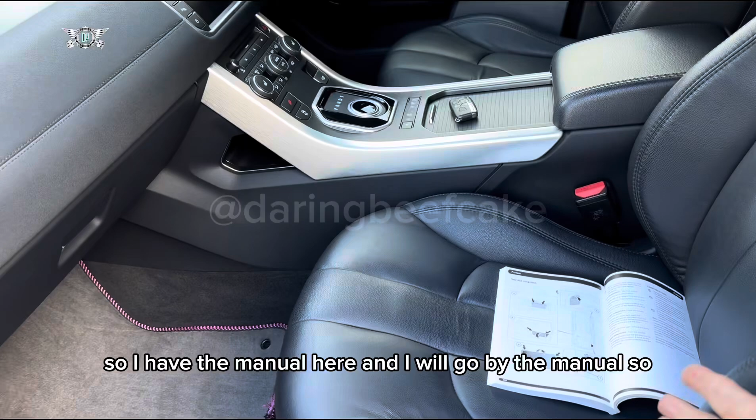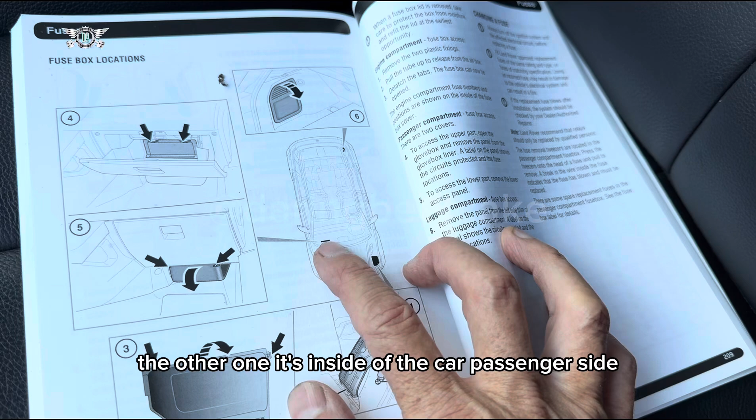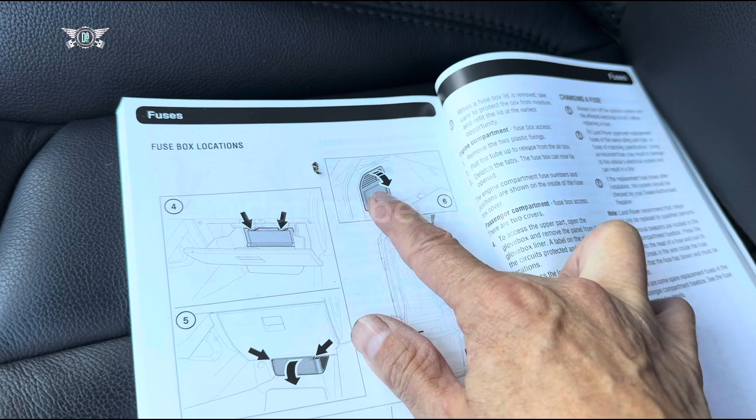According to the manual, there are 3 fuse boxes: one is in the engine bay under the bonnet, another is inside the car on the passenger side, and the other is in the boot, behind that panel. Now we'll have a look at the interior ones first, and it shows us here how to access that fuse box, figure number 4, figure number 5.

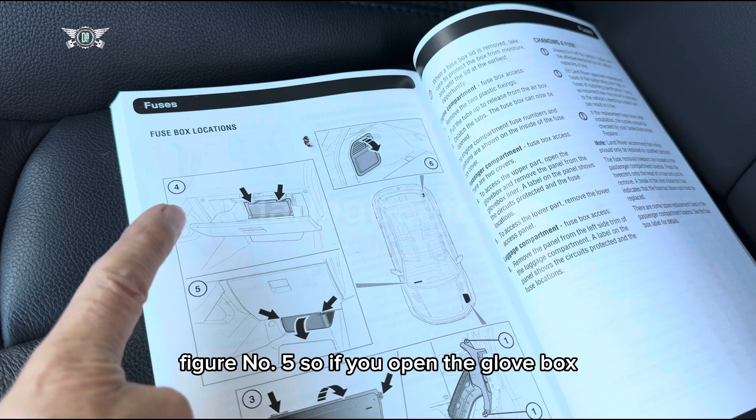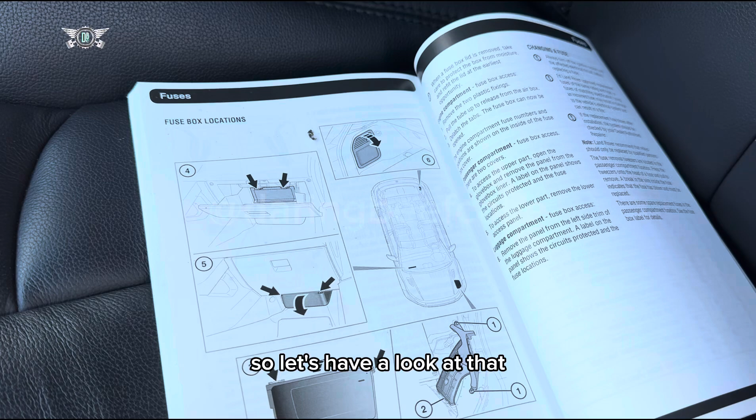If you open the glove box, there is a little cover in there, and you need to push the 2 little tabs down and bring that cover out. At the bottom there is a black cover sitting behind, which again we press on the tabs and remove. So let's have a look at that, but before we do, we'll have a look at the locations shown here in the manual.

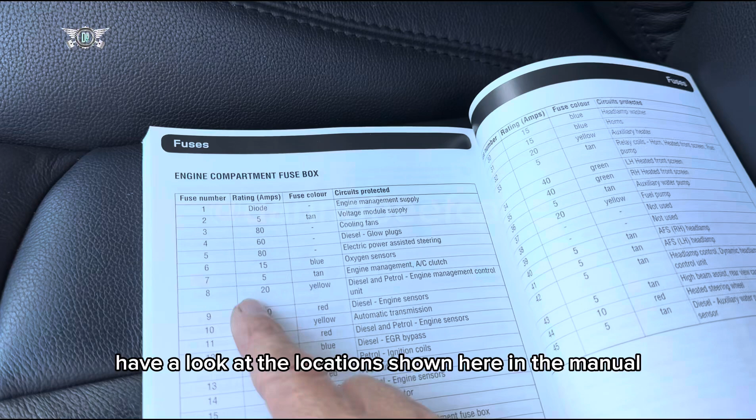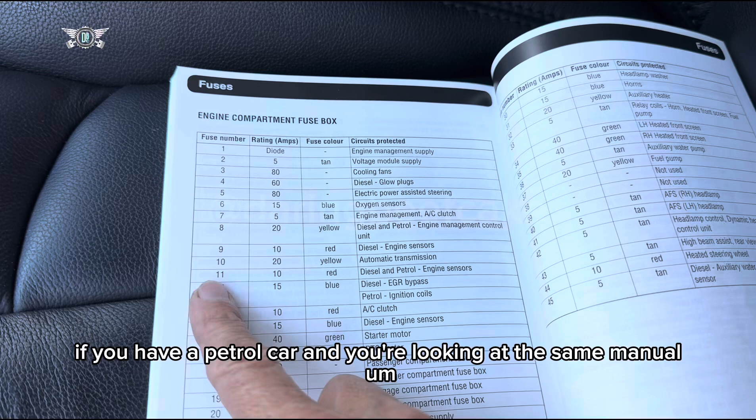So remember, this is a diesel car, so if you have a petrol car and you're looking at the same manual, certain things won't apply, such as diesel EGR bypass. In my case, petrol ignition coils wouldn't apply.

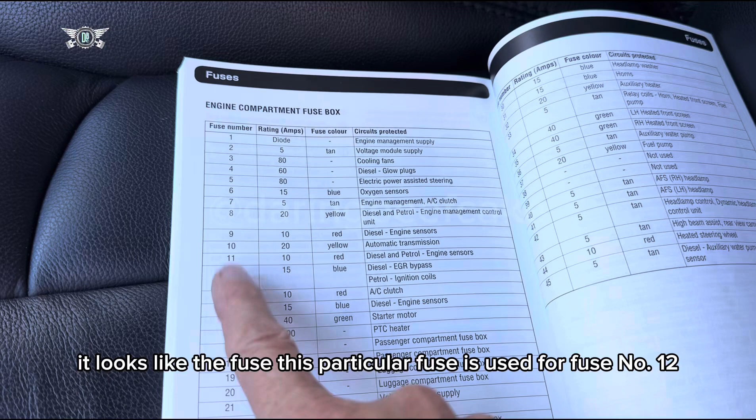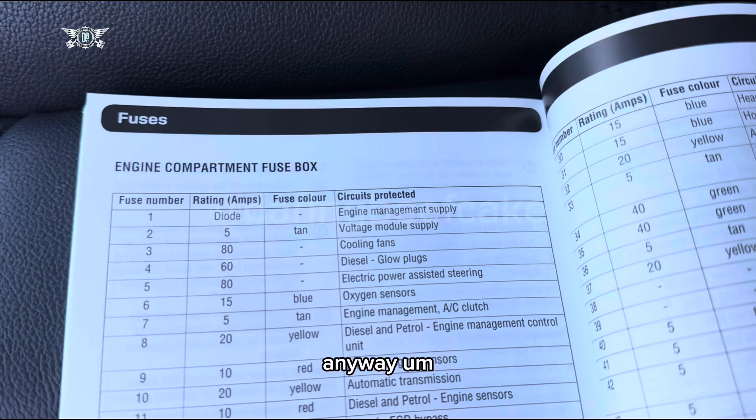However, it looks like this particular fuse, fuse number 12, 15 amp blue, is used for the diesel EGR bypass and the petrol ignition coils. So that's the list there. I'm just going to slowly go down, and if you need to look for a fuse, pause the video and have a look.

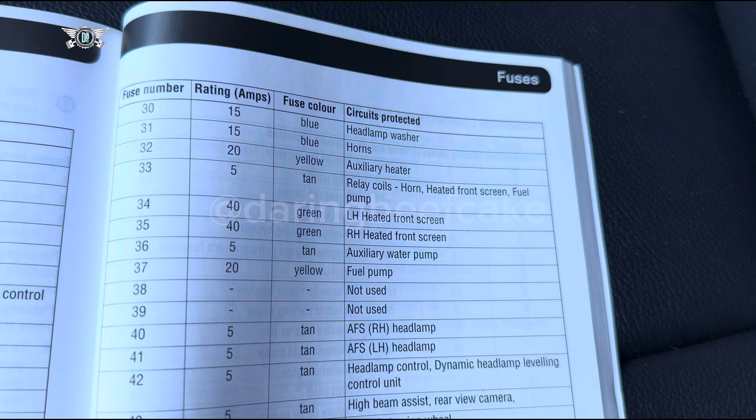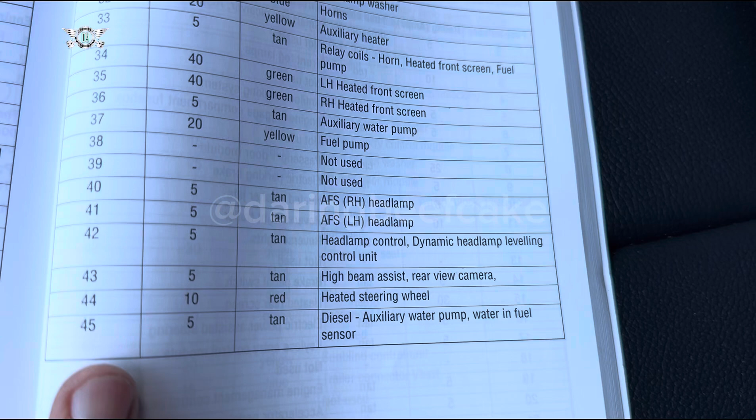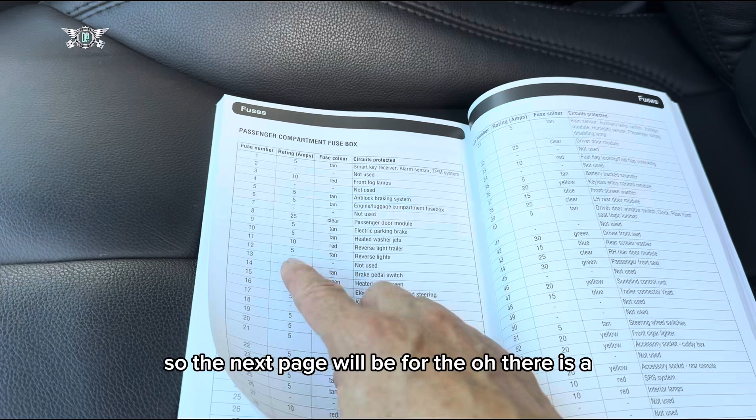And that's it. So the next page will be for, okay, so that's actually the engine compartment fuses, and this will be the passenger compartment fuses.

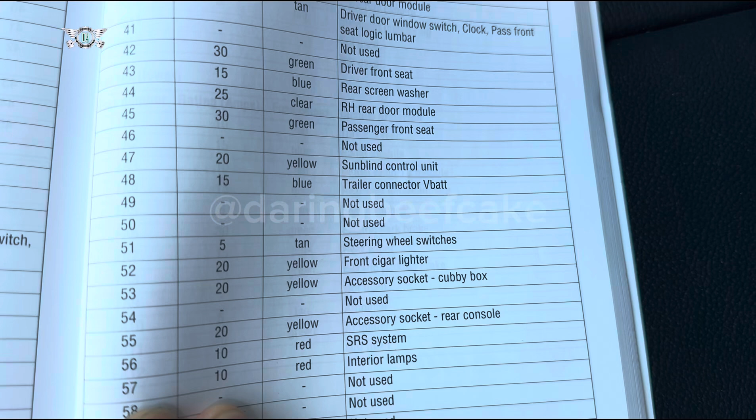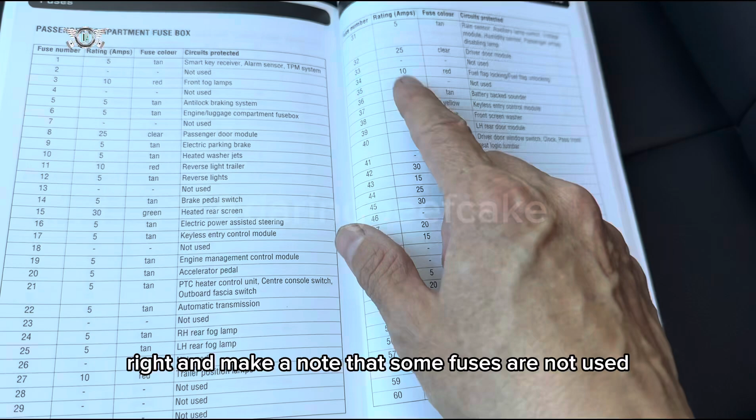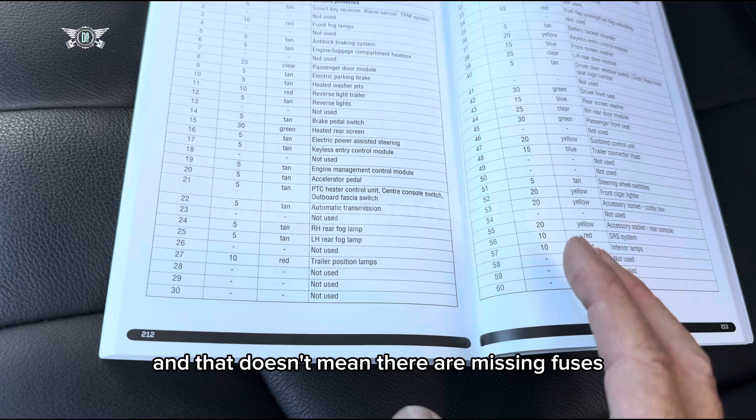Make a note that some fuses are not used, so there will be empty slots on your fuse box. That doesn't mean there are missing fuses, it just means that particular fuse may not be used on your car because the car doesn't have that feature. So like this car doesn't have a sunroof, so a sunroof fuse may not be shown in here.

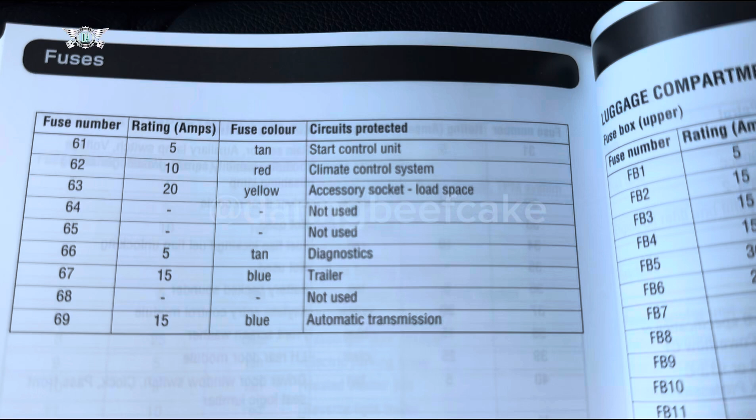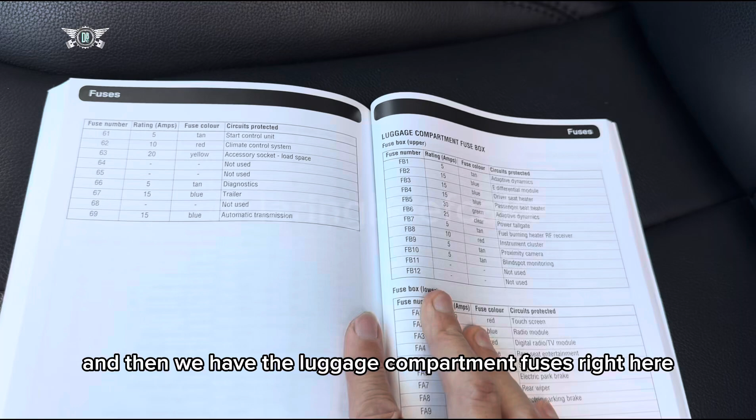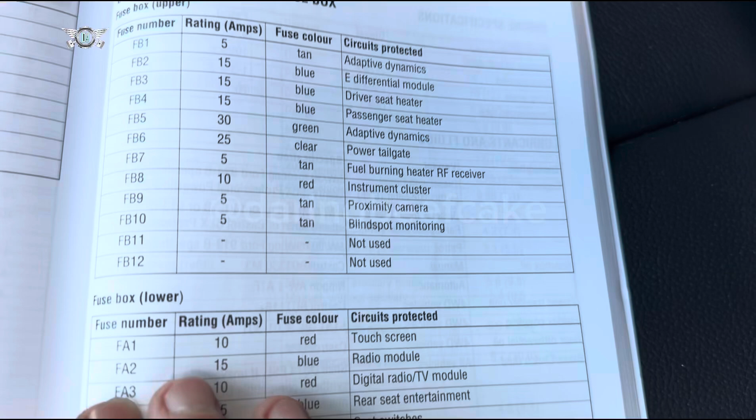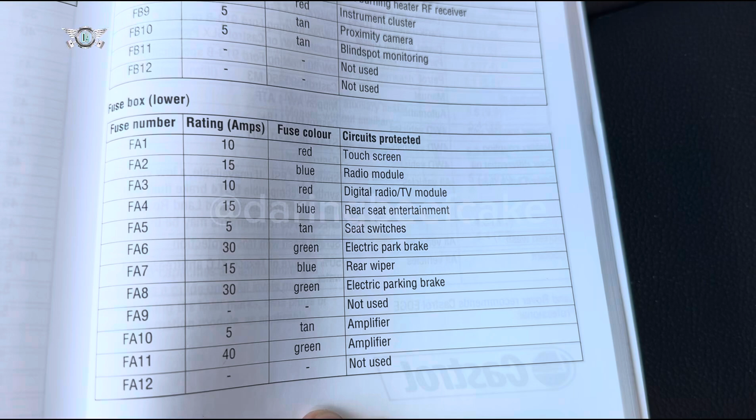There are some more in here, numbers 61 to 69, and then we have the luggage compartment fuses right here. It says upper and lower. That is it as far as, yes, this is other stuff, specifications for engine, lubricants and whatnot.

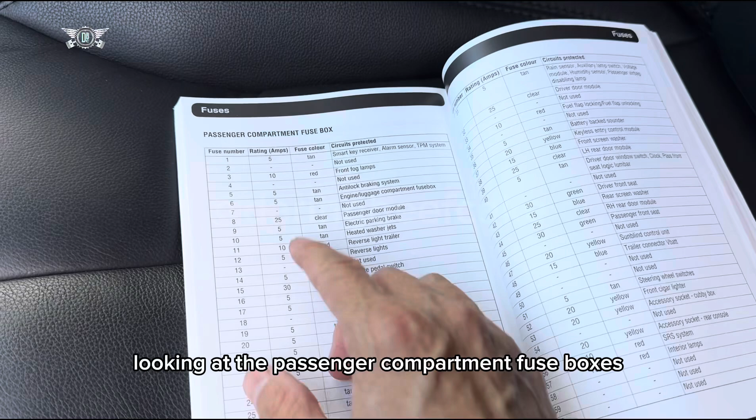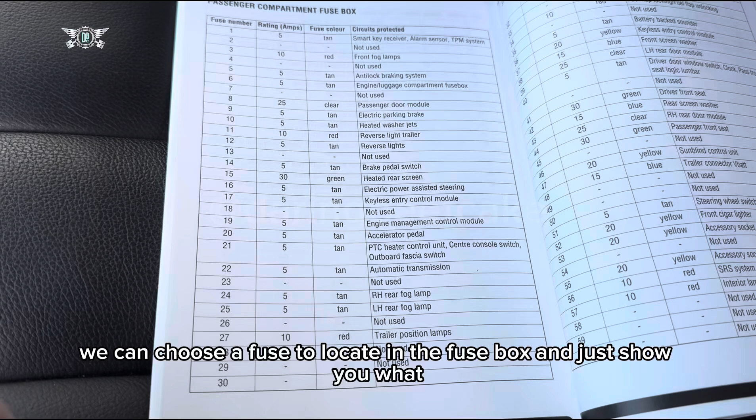So now if we use one of these as an example, looking at the passenger compartment fuse boxes, we can choose a fuse to locate and show you how you can find it. So say...

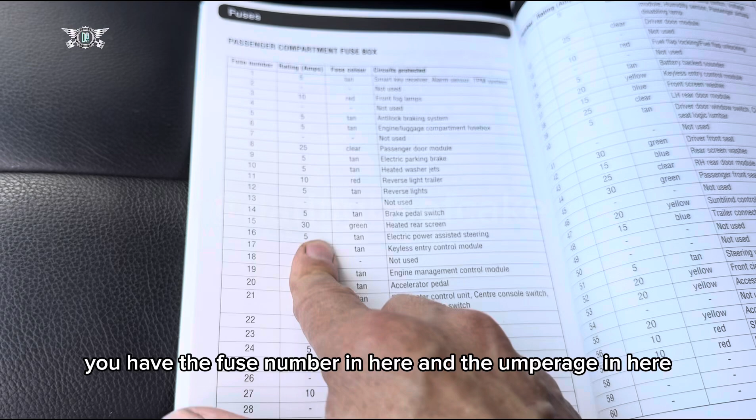By the way, you have the fuse number here and the amperage here, so 25 amps, 5 amps, 5 amps, and then it gives you the color of the fuse. If you found a different rating fuse or a different color fuse in the slot, that may mean that somebody has already had a look at that and perhaps placed the wrong fuse.

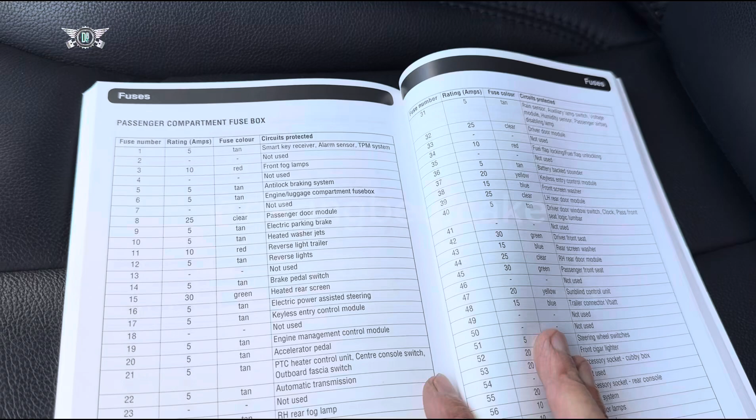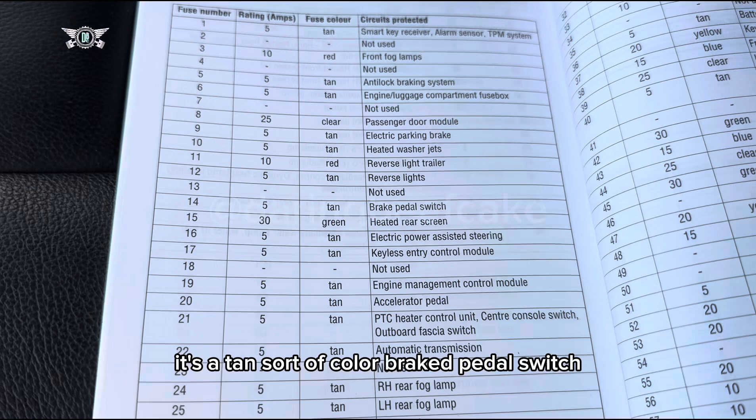So I don't know what we can look at here, say fuse number 14, 5 amp, a tan sort of color, brake pedal switch. Let's look for that, and at the same time we'll see where the fuse box is.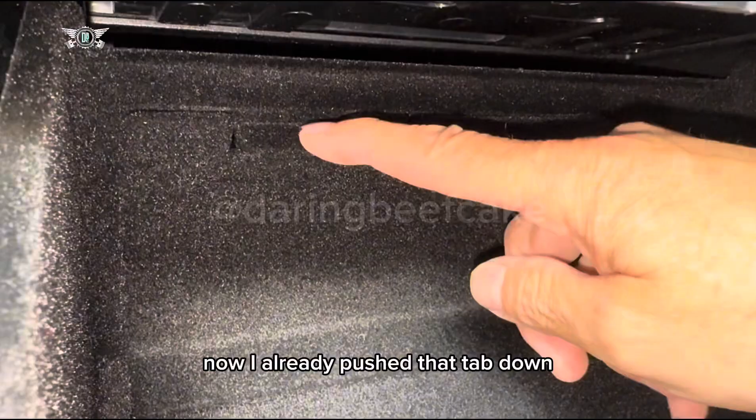Open the glove box here, and in there is that cover. I already pushed that tab down, and all you have to do is push the tab down and bring this out. So technically I had already... there we are. Okay, so take that out, and you will find also some fuse allocations here.

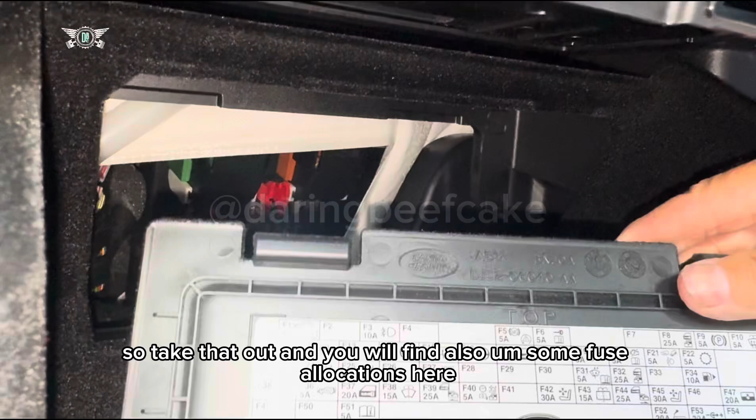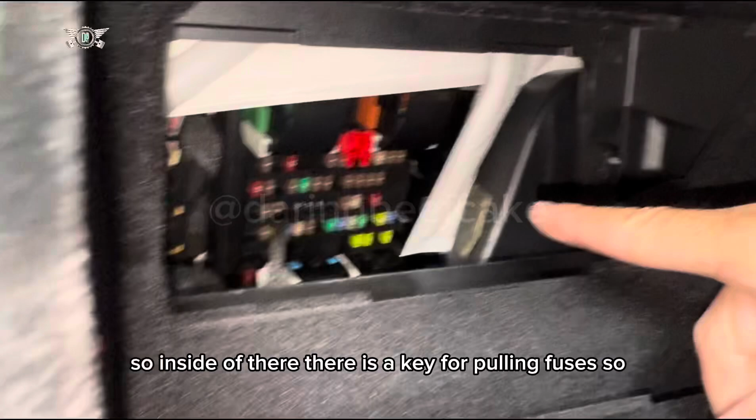You can see the drawing there and the numbering, so fuse number 1, number 2, number 3, number 4, and so on. And there is also a key inside of there for pulling fuses. This little key here, this side is for the small fuses, and usually this side is for the bigger fuses.

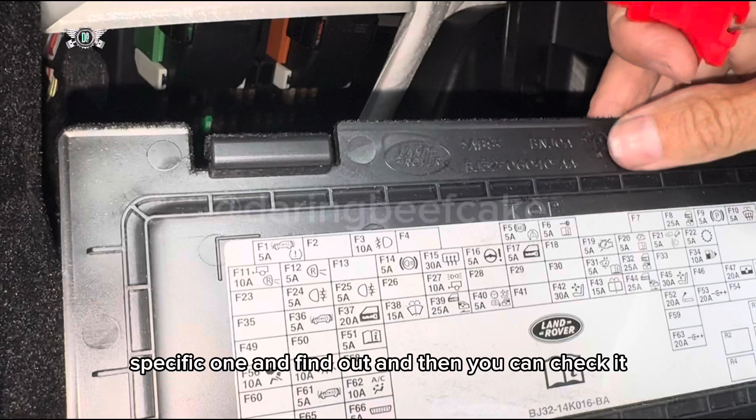Now obviously nobody really recommends just going in there and pulling fuses out. Make sure whatever fuse you're looking for, find that specific one, and then you can check it. Don't just pull all the fuses out. So if you're looking for fuse number 14, as shown in here, 5 amp, brake light switch, something like that.

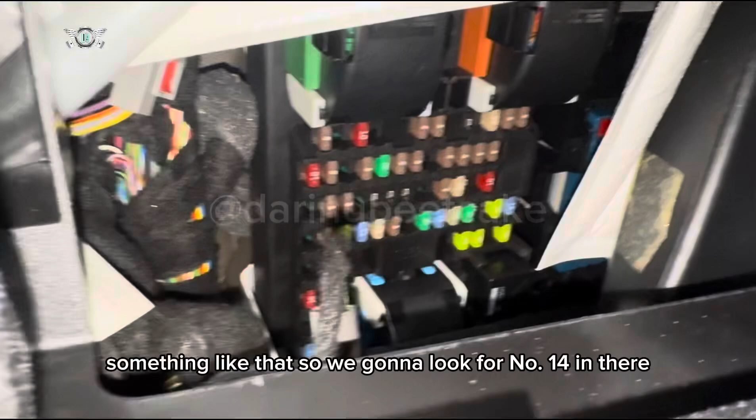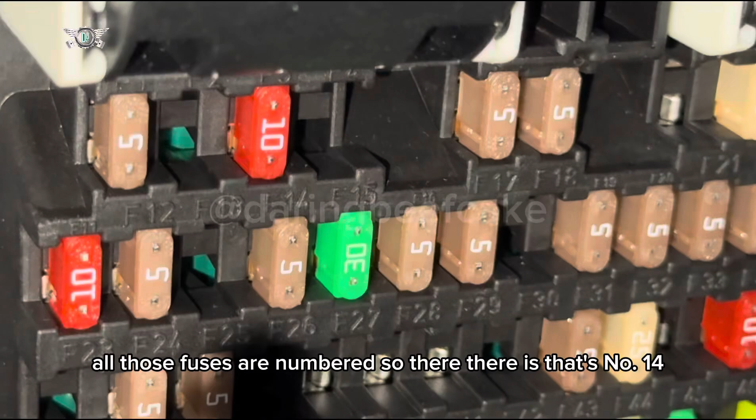So we're going to look for number 14 in there. You can see all those fuses are numbered. So there it is, that's number 14, right next to the green one, this one here. So that's how you would grab it and take it out.

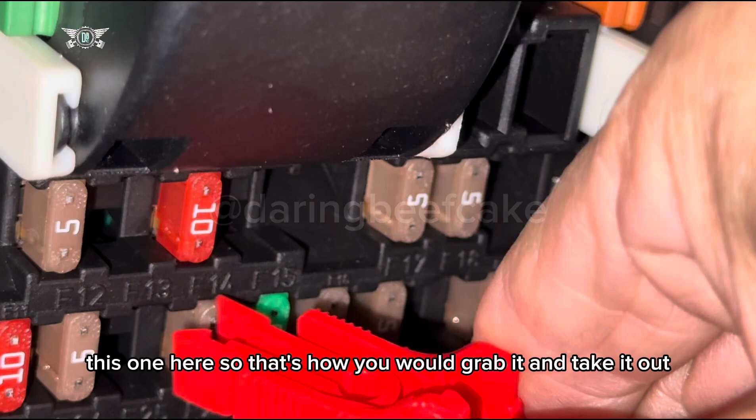I don't really want to pull it out, and I'm not really looking for any fuses as such. I just don't want to pull it out because that could cause a fault code to be generated on the car. So that's how easy it is really.

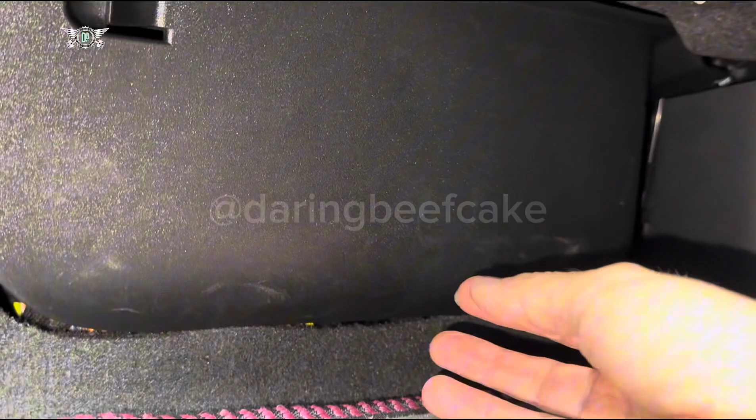You can find the same fuse box from down here. It just gives you some access. So you have this tab here, and on the other side that's where you have some more fuses. It is the same fuse box, but it's quite long, so it goes all the way down here.

So you may not be able to access this fuse from the glove box compartment, which is fuse number whatever that is. Let's try to focus on that. All right, so those are actually spare fuses.

Those 6 there are spare fuses. And just there we have fuse number F66, 68 and 69. But you can see that 68 is not available - there's no slot for it even. So that's pretty much it.

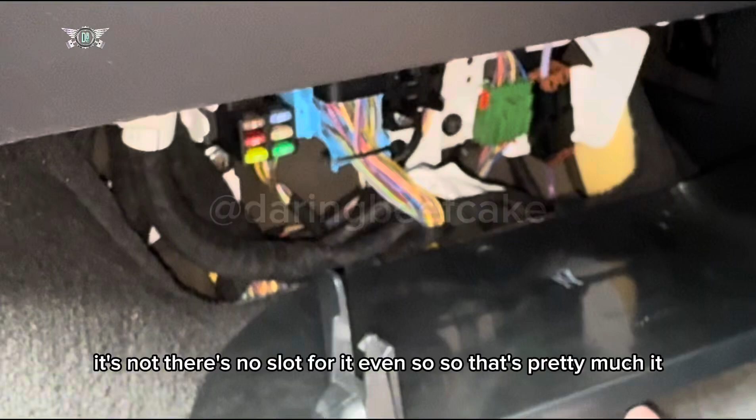Now we can fit this back, and we can also obviously close this one.

There we are. And now we're going to look at the ones under the bonnet. So open the bonnet.

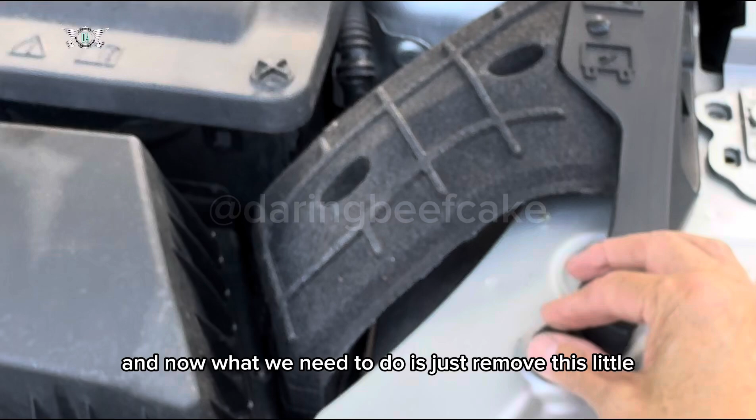We've already seen the list, so we don't really need to check that again. And now what we need to do is just remove this little - okay, there's a missing one there. That is this type of button there, which I do remember losing one, so which must be the one that was there.

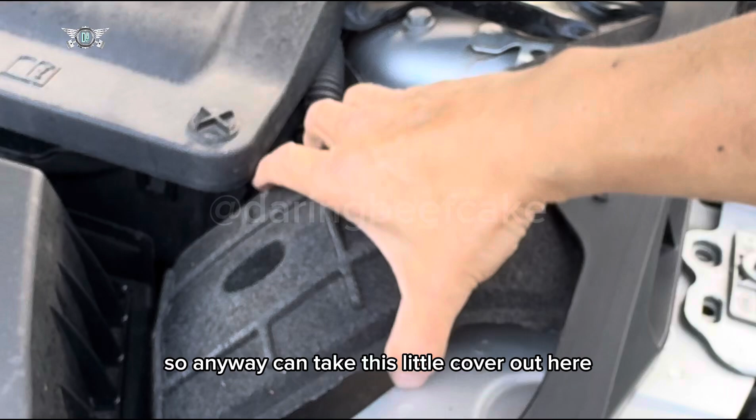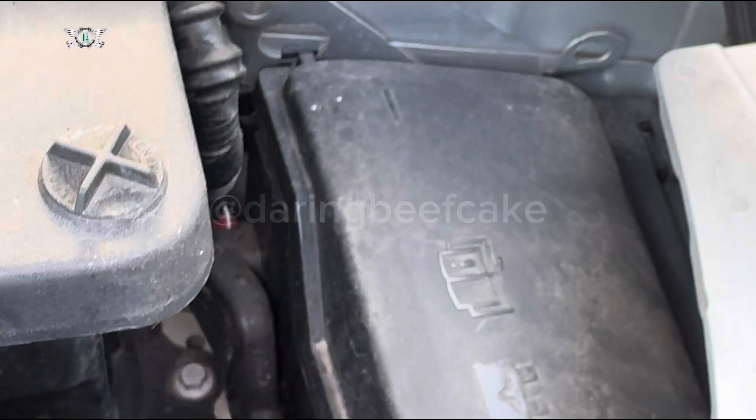So anyway, you can take this little cover out here quite easily, and then this is the fuse box in here, which we want to try and push those tabs to one side and get this cover out.

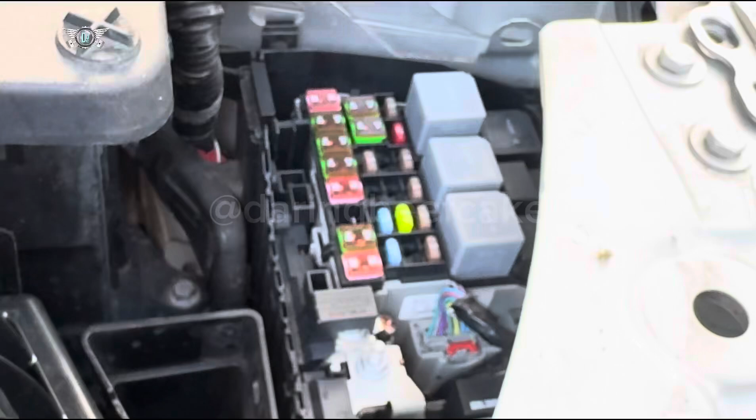And again, you have some spare fuses right there, and you have the little key. That white thing there is the key for pulling out the fuses. So you have the normal fuses here, and then you have those micro fuses there. Those are the spare ones.

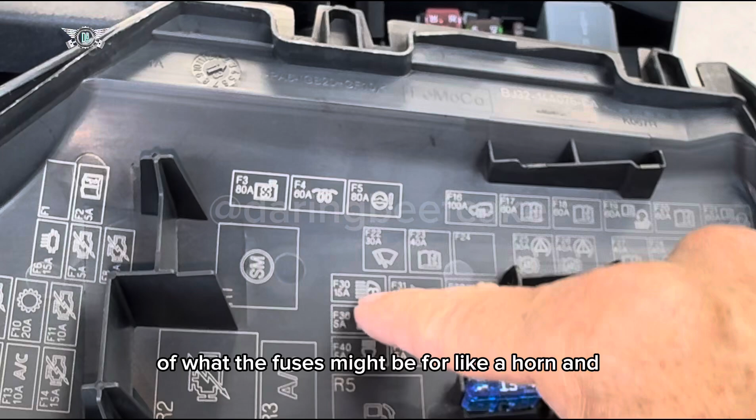And again, this cover sort of gives you a list of what the fuses might be for, like a horn, radiator fan and so on, a few other things. But obviously with your manual you can be a bit more specific about those fuses.

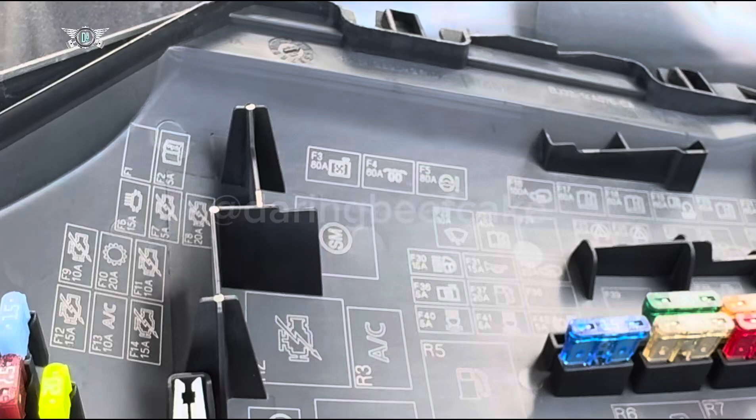And here's where we have the fuses. We also have some relays. Unfortunately, the relays are not - well, actually there might be. These are the relays here. So it looks like the diagram sort of shows you maybe wiper blades, or like wiper motors.

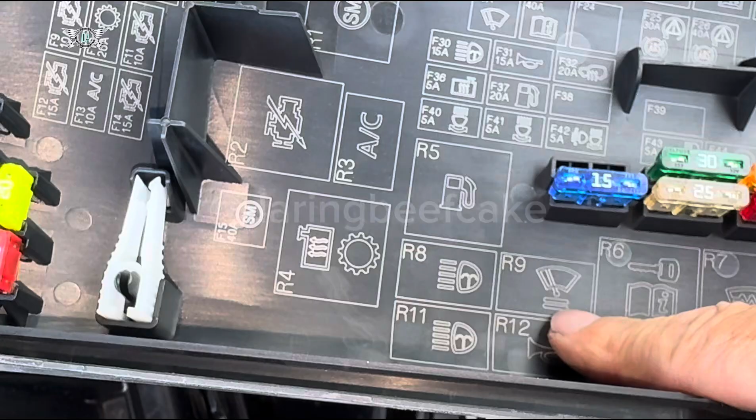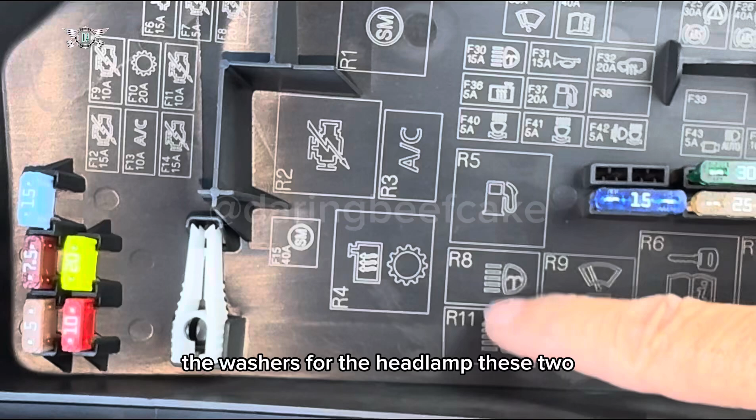This is like I think this is the heater of the windscreen, the key, another sort of wiper blade, maybe another different setting, a horn relay, the washers for the headlamp, these two, that's the fuel pump, maybe another relay here. This might be for the radiator fan.

Another one there, not sure what that is, but yeah, usually most cars don't really show you what the relays are for, so in this case it's not bad. Another relay there, that's for the AC, air conditioning, and that's an engine one.

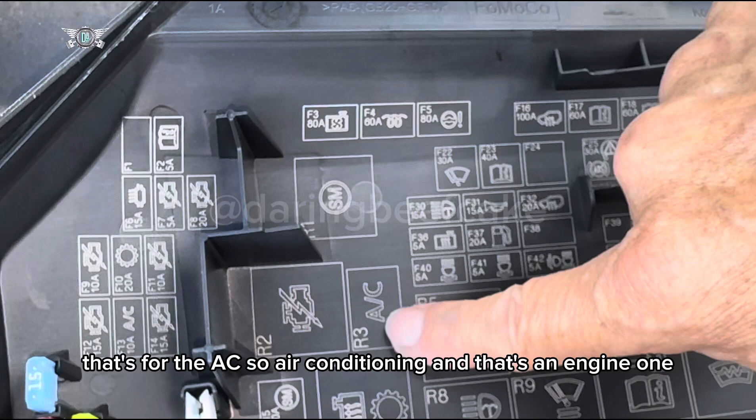And well, that's where your fuses are, that's where your relays are. Some more fuses down here, and I'm pretty sure those are also numbered. So if we have a close look, you can see that F30, F36, F40, 41, 42 and so on. But you can also see the empty slots where fuses are not used. So on models which may have other extras, may actually have those fuses in place.

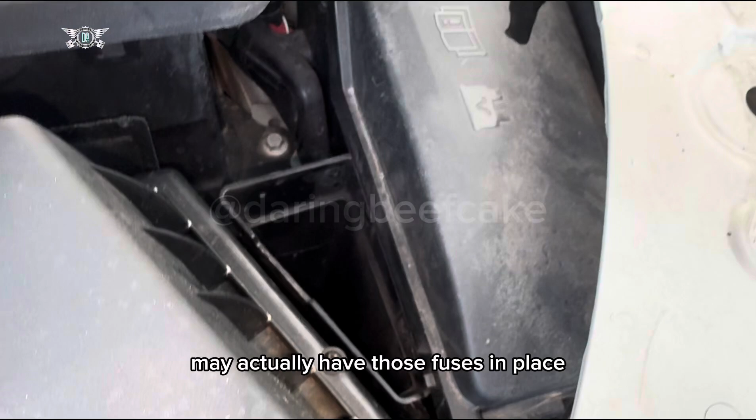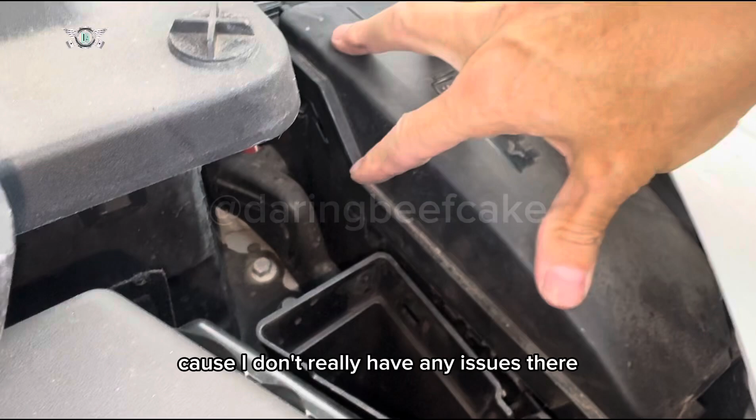So just gonna put this little cover back on here. Again, I don't need to start pulling fuses because I don't really have any issues there. Nice and locked. And then we can put this cover in here.

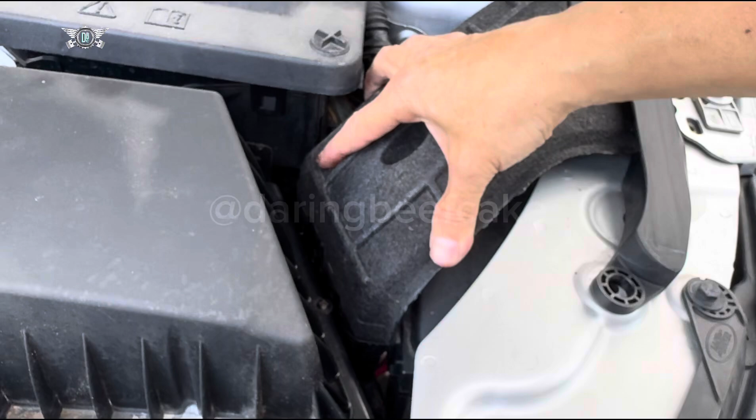Make sure that is fitting nicely in there. And then we can put our little clip back in here.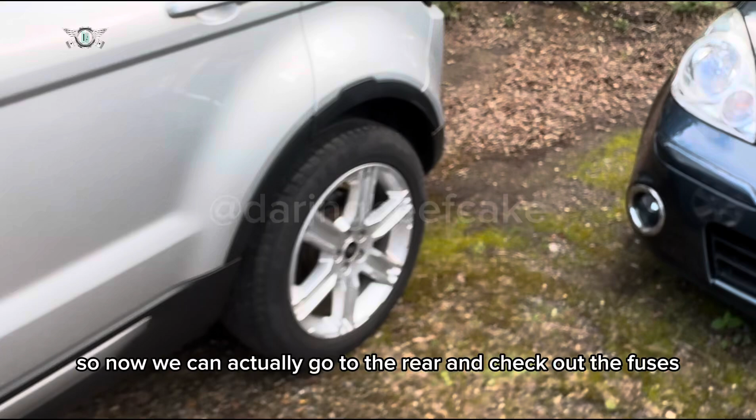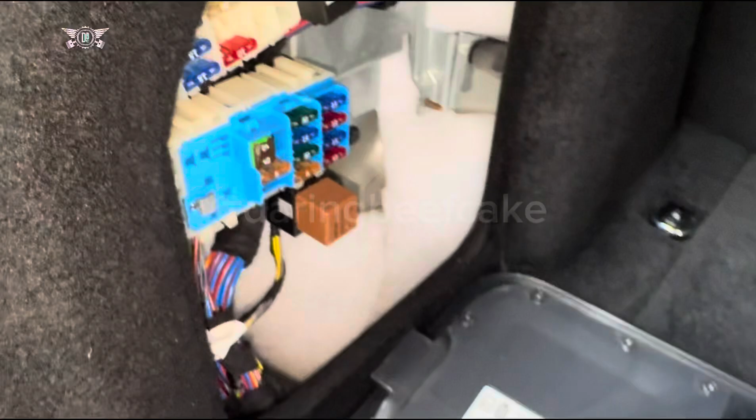And that is that. So now we can actually go to the rear and check out the fuses. So open the boot, and behind this cover is your fuses. And again, another relay, and again another list here of what the fuses are for.

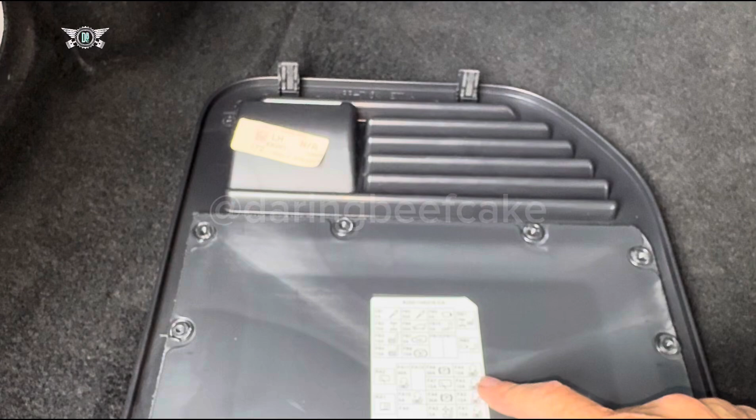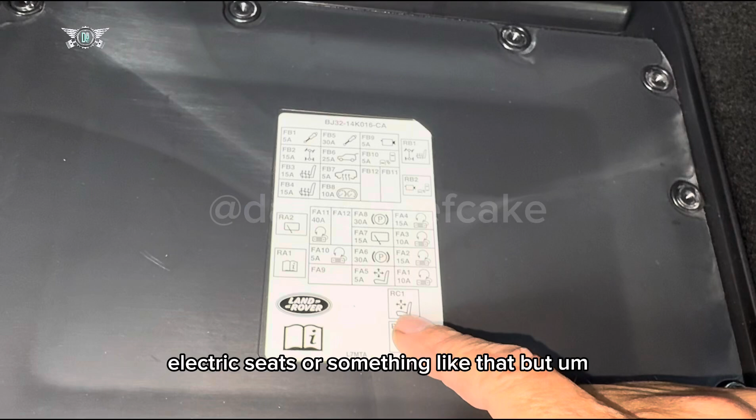So like this relay here might be for the electric seats or something like that, but well, again, I'm not really sure. That might be for the rear wiper blade one. And well, yet again, you have the fuse numbering, the rating, the amperage.

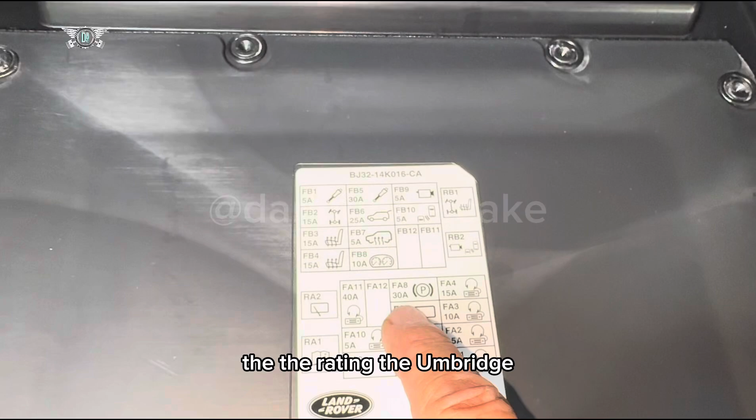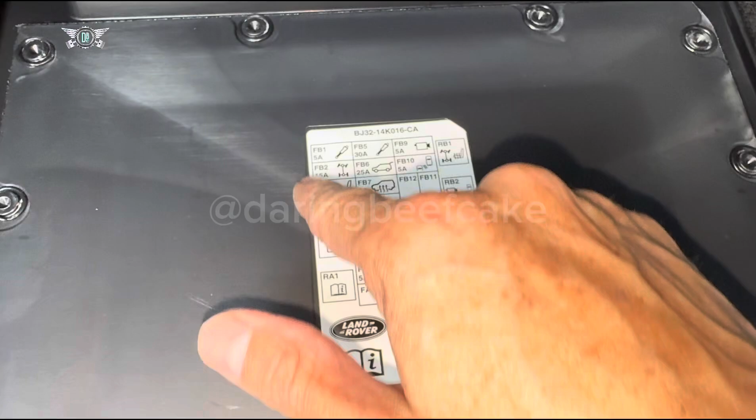And you will have that written somewhere in there for sure. But saying that, in this particular diagram, it is showing you the diagram here and the two relays here, for example. That would be this diagram up here and these two relays. And then you have another two relays here which are not in this car.

One relay here and then the fuse box. And that's what we have here. Two relays, fuse box, and one relay is being used in this case scenario.

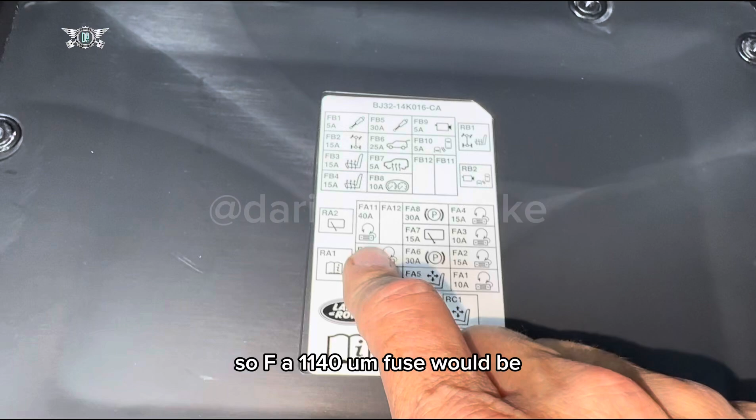So FA11, 40 amp fuse would be that one there. FA12 would be that one there, which actually you can just about see the numbers there. F11, F12, they are written in blue, a little bit difficult to see.

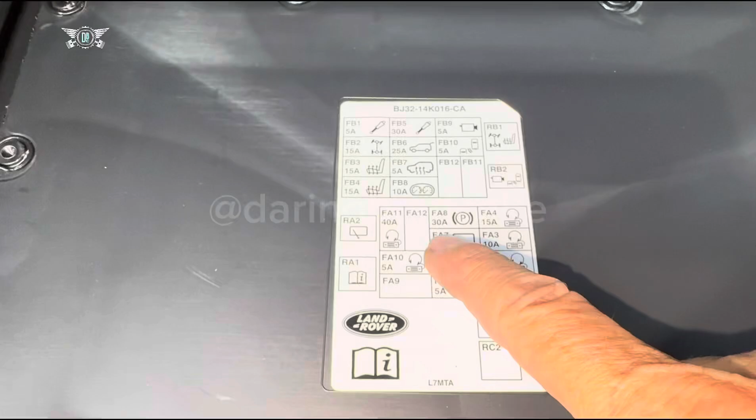Then you have the 5 amp fuse just there. Again, it does have a numbering, but it's a bit difficult to see. And then you have FA9 just sitting below, which is empty. So this one here is that one there, and that is empty. Then you have 30, 15, 30, and 5, and so on.

And that's pretty much it, really.